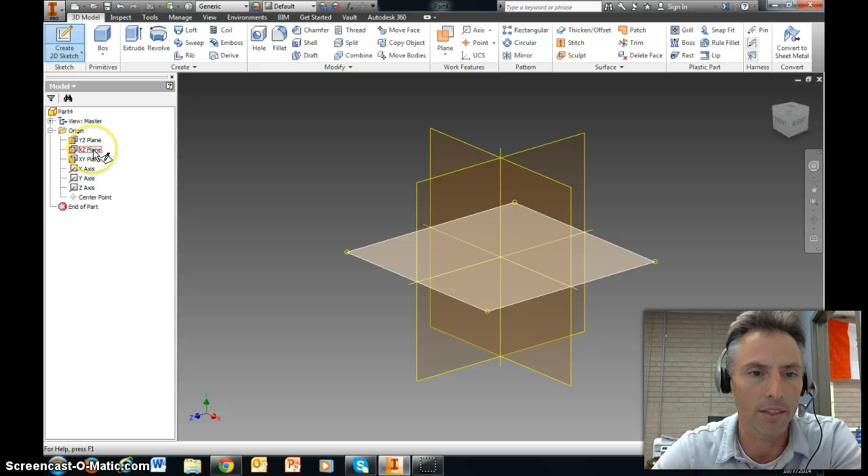Click on this sketch right up here, the 2D sketch, and you're going to get these options. Let's go ahead and hit the plus next to origin, and that's going to show you the YZ plane, the XZ plane, and the XY plane. We're going to go ahead and just choose the XY plane for what we're doing right now.

I'm going to start you off with a rectangle. So choose 2-point rectangle, and we're going to click once, drag down, and click again. Then we're going to go to dimension, and let's go ahead and make this thing 2 inches wide. We're going to have to zoom back in, and let's make it 2.5 inches tall.

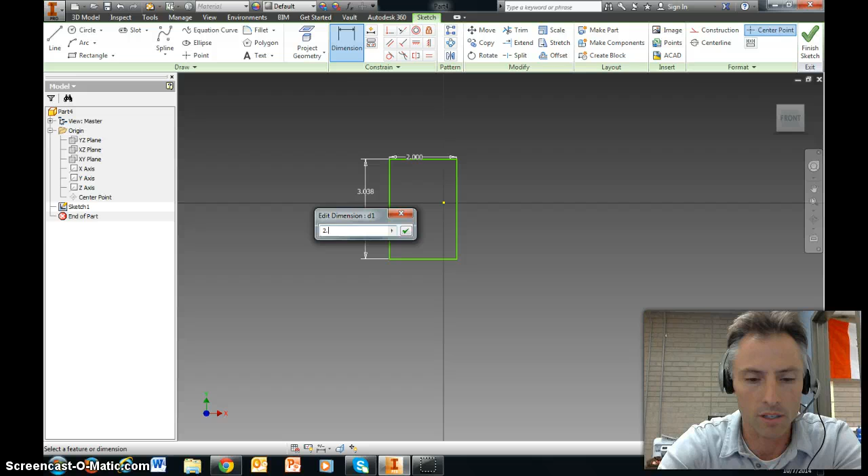Just like that. Now we're going to go to arc, and there's a couple different types of arc, but we're going to choose 3-point arc. The way that works is you click a vertice, then you click another vertice, and then you can pull your arc to make it whatever radius you want. If you locked it right here, that'd be a perfect half circle, which we don't want. We want a flatter circle than that.

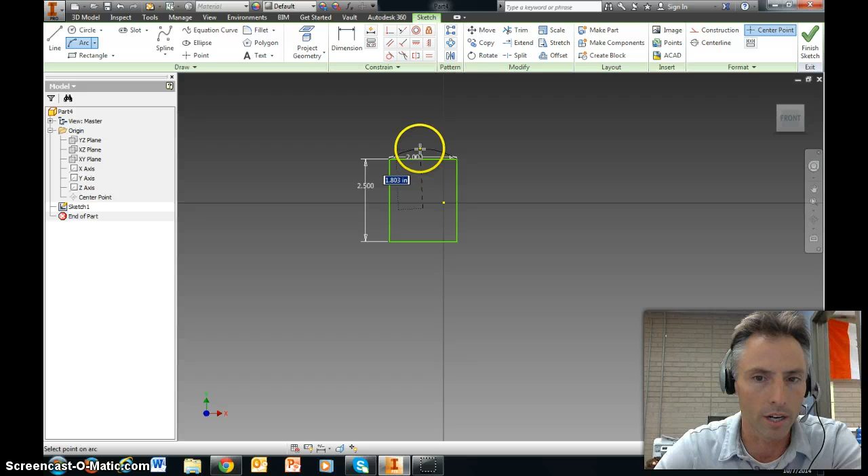So I'm going to put it right there and dimension, and let's go ahead and make this 2.24. So it's looking just like that.

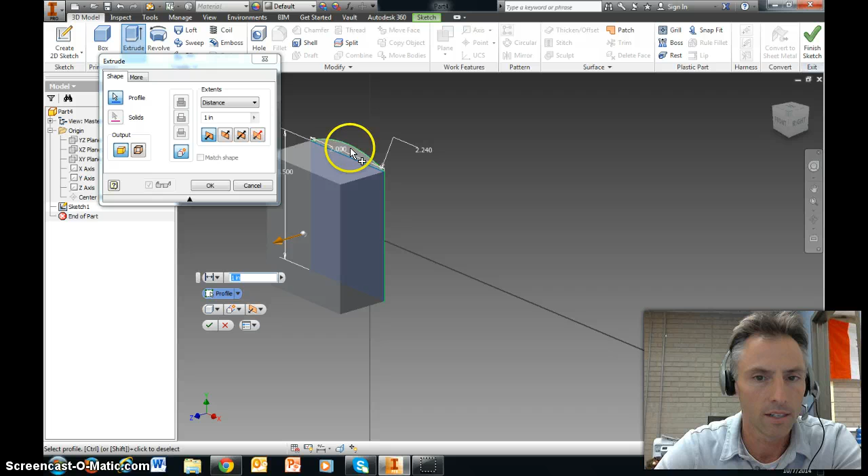Now we're going to go up to 3D model, and we're going to extrude this so that it has a third dimension. For profile, we're going to select this, and we can either extrude it forward or extrude it back, either one will work. I'm going to put a total distance of 5.5 inches. So it's going to look something like that.

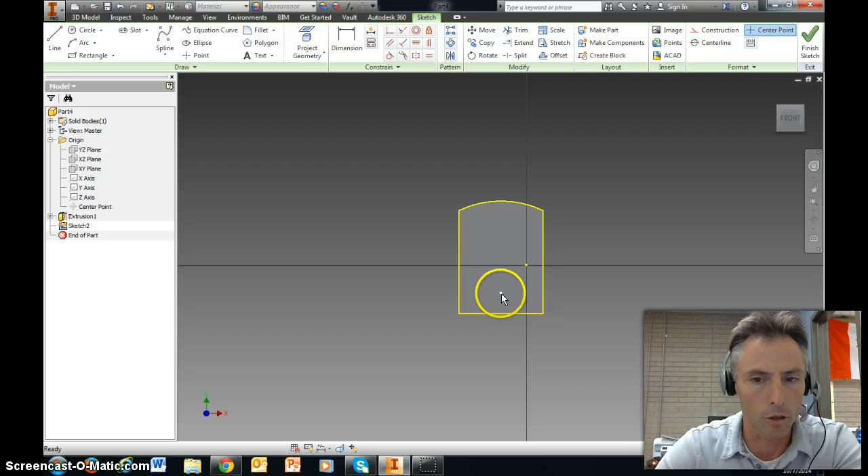Next step, we're going to take a sketch and put it right on the front of this guy. Now you want to be careful, you got a couple little points on here. You don't want to lock to those because it would constrain your sketch, and we don't want that.

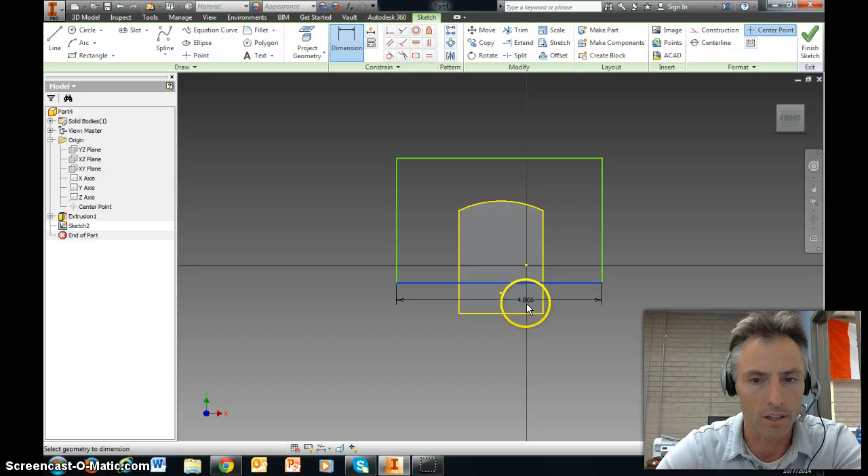So I'm going to go to rectangle here. I'm going to click up here and something like that. I want to make sure the top is well above my train and the sides are well to the outside, but this one is inside. Then I'm going to go to dimension, and the only dimension I need for this is to make sure that this line is 0.87 inches above the bottom of the train. And here's what that looks like.

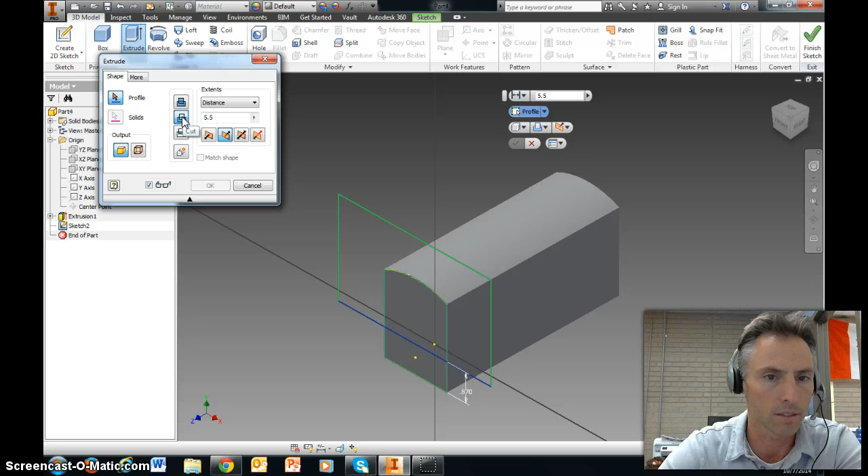Now I'm going to go to 3D model, and we're going to go to extrude, but this time instead of doing join, which adds material, we're going to do cut, which removes material. So I select this, the profile we're using is this rectangle. Now it defaulted to the same distance we just used, which I don't actually want. I only want it to go back 3.75 inches, and we'll say OK, and it should look like that.

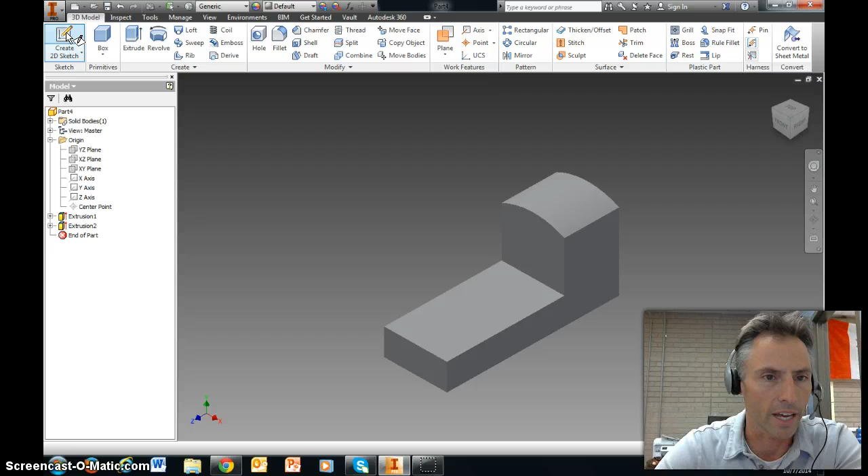Next step, a new sketch on the front face, and we're going to use circle. Again, don't lock it to anything in particular, just throw a circle on there. And let's now go dimension it and make sure that the circle has a diameter of 1.5 inches.

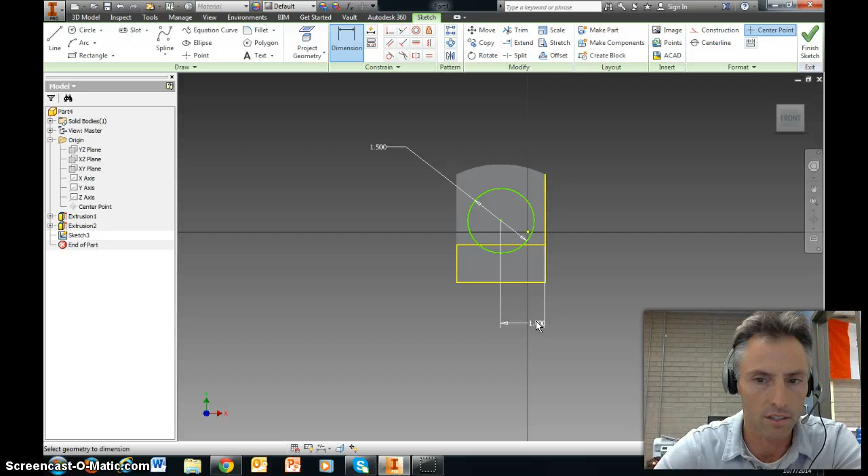And it has a distance from the side of 1 inch, because the total width was 2, so if the distance from the side is 1 inch, then it's centered. And then a distance above this line right here of 0.5 inch. And again, if we look at that in isometric view, it looks like that.

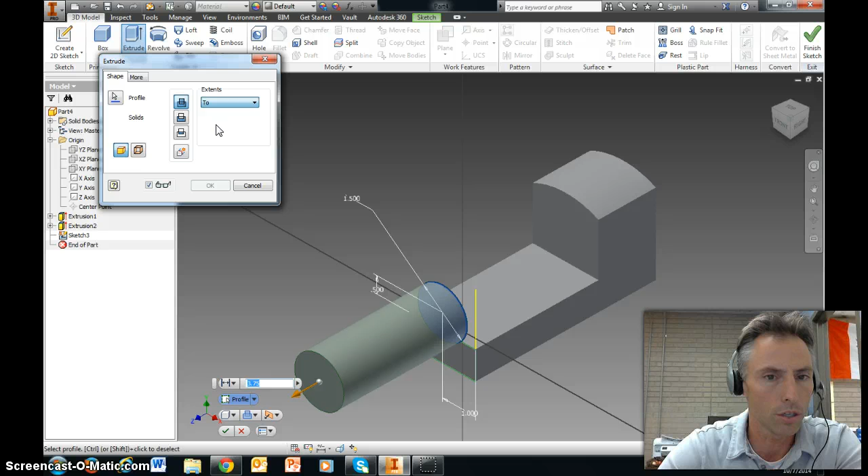Now what we're going to do is we're going to go to 3D model again and extrude, and we're going to select that circle. But instead of a distance, we're going to say we want it to go to this face.

Now it's in cut mode right now, so it would actually remove material if we left it like this, instead of adding material. We want to add material, so we're going to pick join to add the material and say OK. So now we have that.

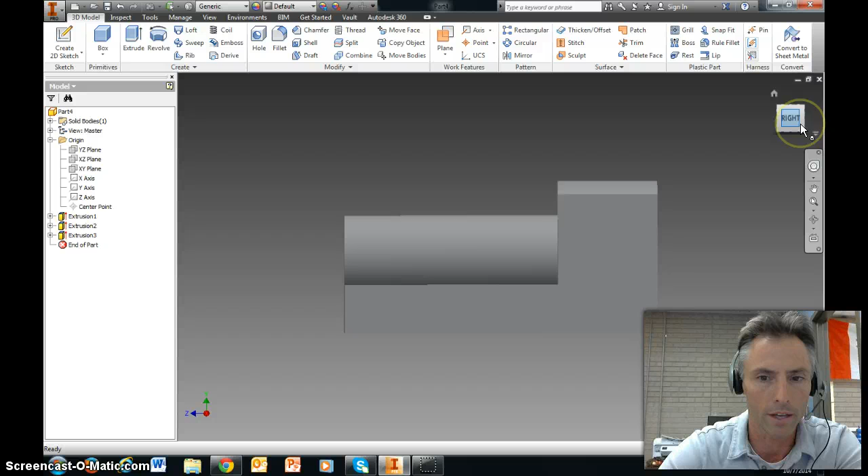Now I want to look at this face of the train, so I'm going to come up here to this cube and click right on the right face. So I'm looking right at it, and I'm going to put a sketch on it. We're going to put two things on here. First, we're going to take a rectangle and drop it just like that.

Then we're going to go to arc, and I want you to click on the bottom corner, and pull it out until you see the tangent signs right there. That tells you that arc is perfectly tangent into that rectangle and is a perfect half circle.

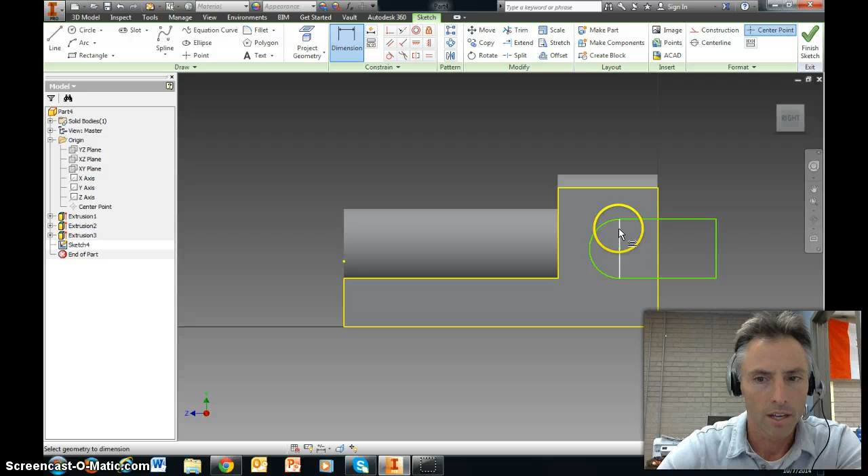Now we'll go to dimension, and I want to make sure that from here to here, the distance between those two edges is 1/4 inch. And I want to make sure that the radius of this arc is 0.5 inch. I also want to make sure that the distance from this center point to the bottom is 1.75 inches.

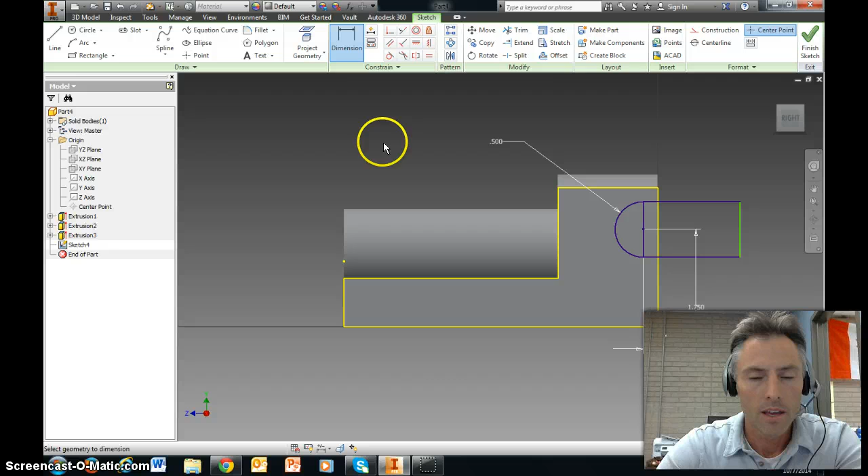Just like that. Now we're going to go back to 3D model and say extrude. Let's select both of these profiles, this and this. And we're going to cut it.

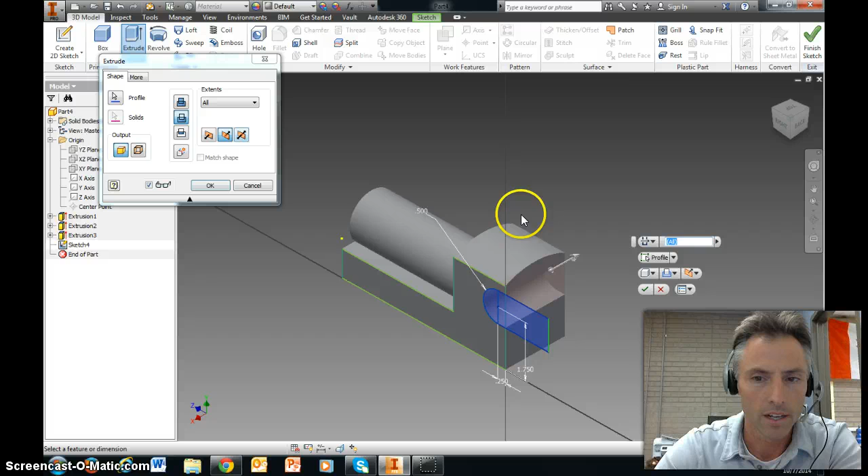Actually, let's go to an isometric view here. It's going to look like that. Let's just say cut all, and that's going to cut whatever material it runs into. We'll say OK, so now we have that. Let's look right at it again.

OK, that's looking good. Now we need some holes on the bottom of this thing, so the wheels can attach to it. So I'm going to say sketch on this face.

And I'm going to do point, and we'll put a point over here somewhere and a point over here somewhere. Now we need to put them in the right spots.

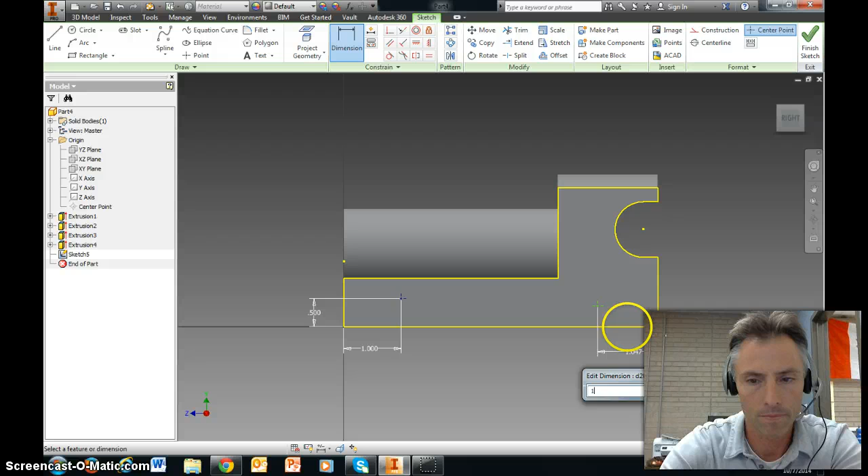So let's go to dimension. I want to make sure it's 1 inch off of the front, and a 1/2 inch off of the bottom. And the same thing over here: 1 inch off of the front, and a 1/2 inch off of the bottom.

Just like that. Now we can go to 3D model, and this time we're going to use what's called hole. It's the hole feature, and the hole will automatically select those two points I put in. If I go into an isometric view, you're going to see that it has selected those, and it's going to make those holes through. The diameter is set for 1/4 inch by default, and we're going to keep that.

And it's also set to go all the way through. There's no distance, it's just going through all, and that's fine also. We'll keep that. We're not adding any threads to the hole, so nothing else is going to change, so we'll hit OK.

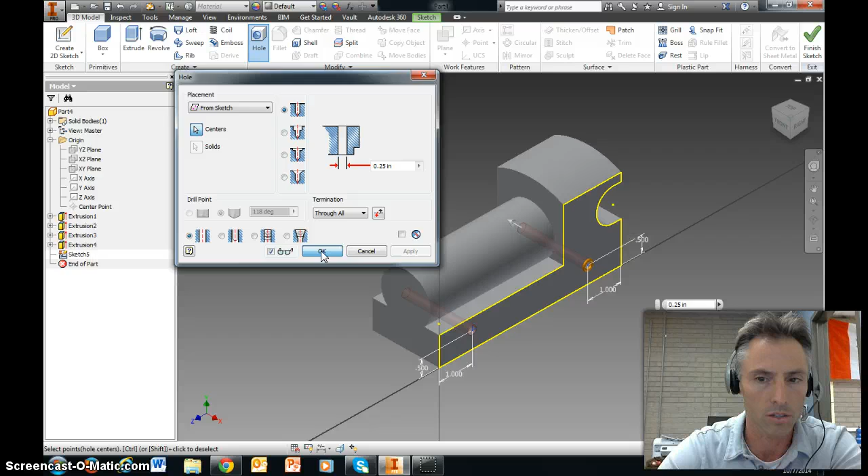All right, the next thing gets a little trickier. We're going to take a plane, and I want to put a plane right on top of this cylinder right here. So that would be just like that.

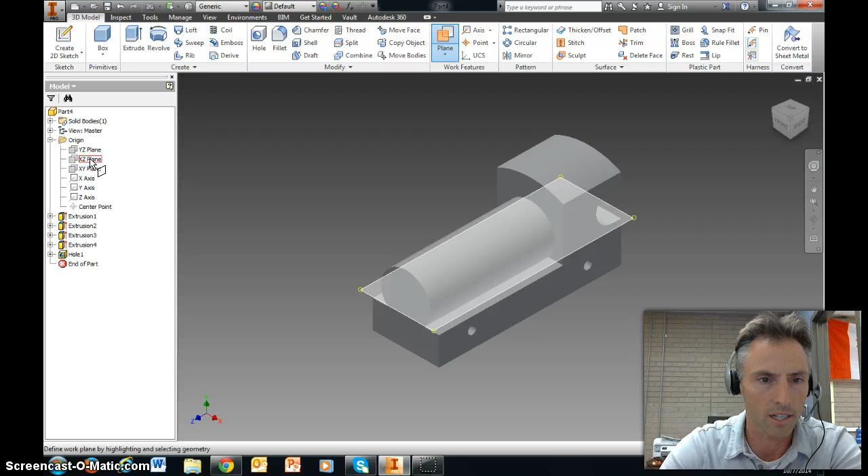It's going to be, so I've got a plane that's going to be parallel to the XZ plane, so I'm going to click on that. And I'm going to hover over the top of this cylinder, and right there it's creating a plane that's tangent to the top. So I'm going to click on it, and it just created that plane. You can see if I look at it from the front, it is tangent to the top of that cylinder.

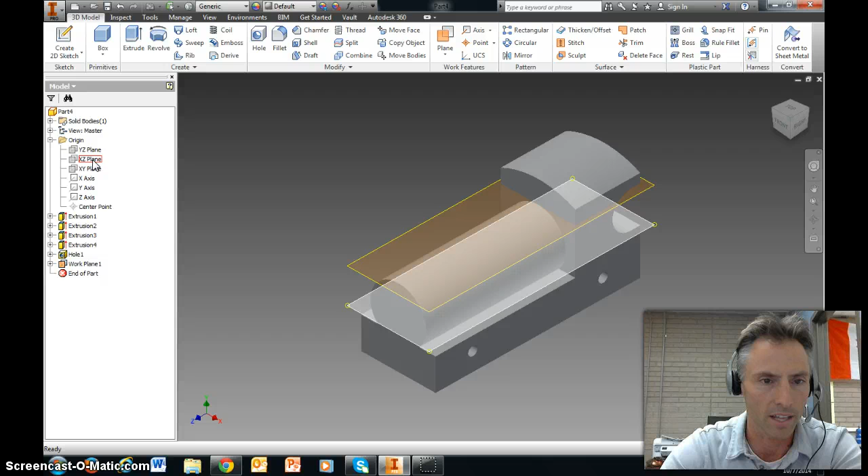And it made it for me by hitting plane and telling it I wanted it to be parallel to the XZ, and then panning over the top of the cylinder, it knew what to do. Next thing I'm going to do is go to plane again, and I'm going to click and hold on one of the corners of this plane, and it's going to allow me to offset an additional plane from that.

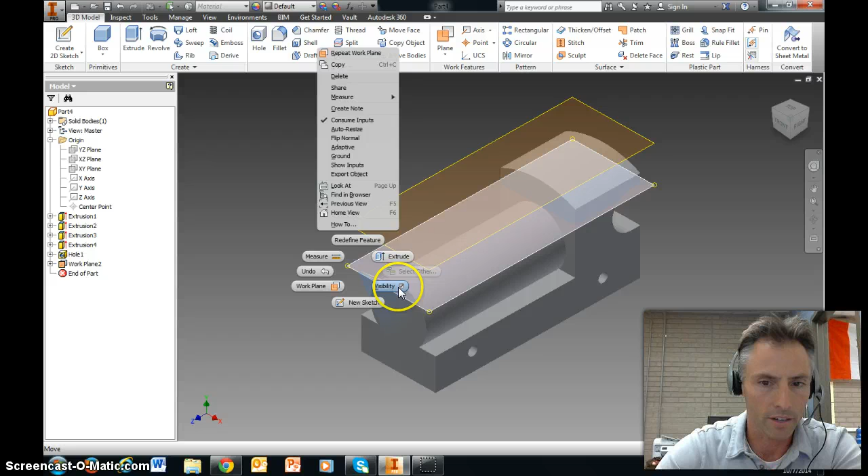I'm going to bring it up 1 inch, which you can type in, or you can just pull it up till you get to 1 inch, and I'll say OK. So at this point I now have 2 planes: one that's tangent to the cylinder, and one above it. The one tangent to the cylinder I don't need to see anymore, so I'll right click on it and uncheck visibility. But the higher one, if you look straight at it you'll see where it is, up above. We're going to do something with that.

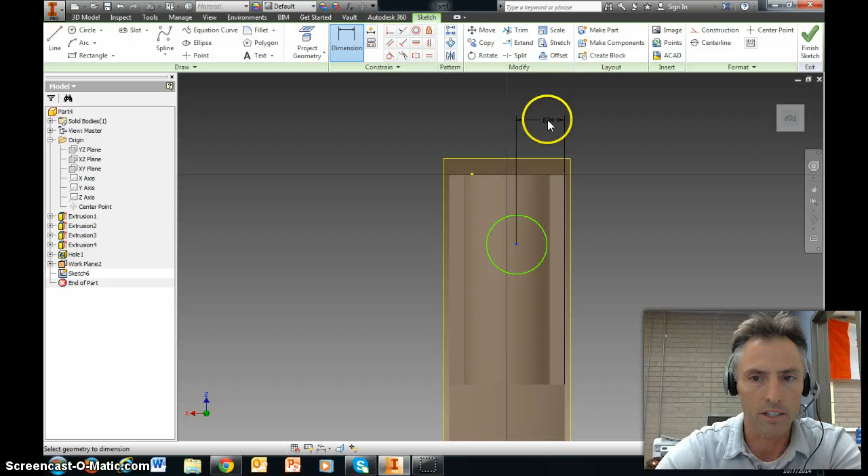I'm going to go to sketch, and if I click on the outside of it I can put a sketch plane right on it, and I'm going to put a circle right about here. I'll make sure it's exactly how I want it: 1 inch off the side so that it's centered, and from the front to the center point should be 0.87. And I want it to have a diameter of 1 inch, just like that.

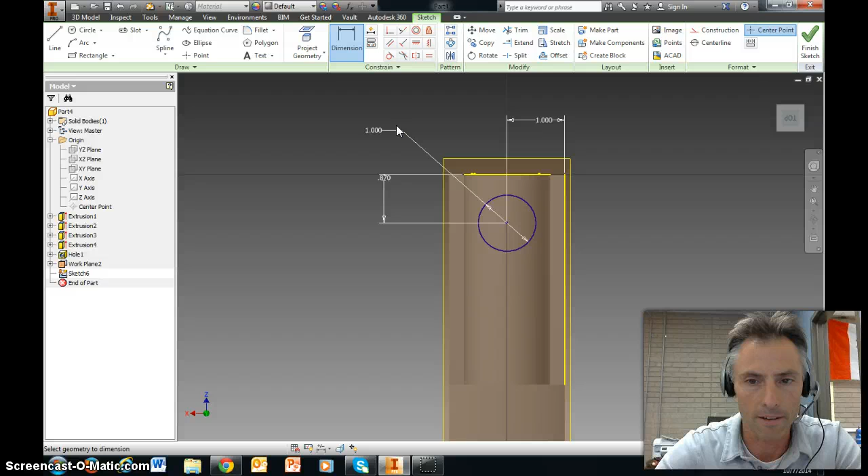Now I want to extrude it down. I'm going to look at it like this, rotate it back down, and actually let's look at it like that. I'm going to go to 3D model and say extrude that, but I want it to go down, and I only want it to go down 1.2 inches.

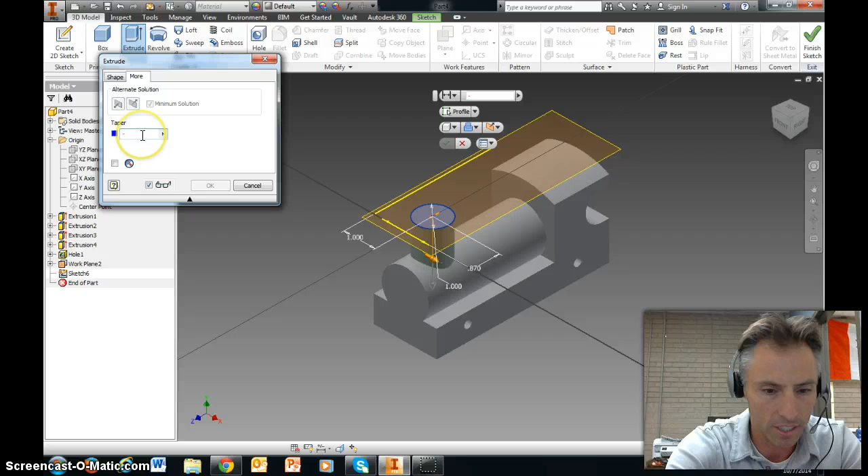When it goes down, I want it to taper so it's getting smaller as it goes down. So I'm going to click on this more button right here and put in -15 degrees. What that tells it is as it's going down, it's getting a little bit skinnier. Then we'll hit OK, so now it's made that. Now I don't need to see this plane anymore either, so I'll right click on the edge of it and uncheck the visibility.

Now we want to make this look even fancier on top also, so I'm just going to put a sketch right on the top surface of it, and that activated my little circle. So that's all I had to do.

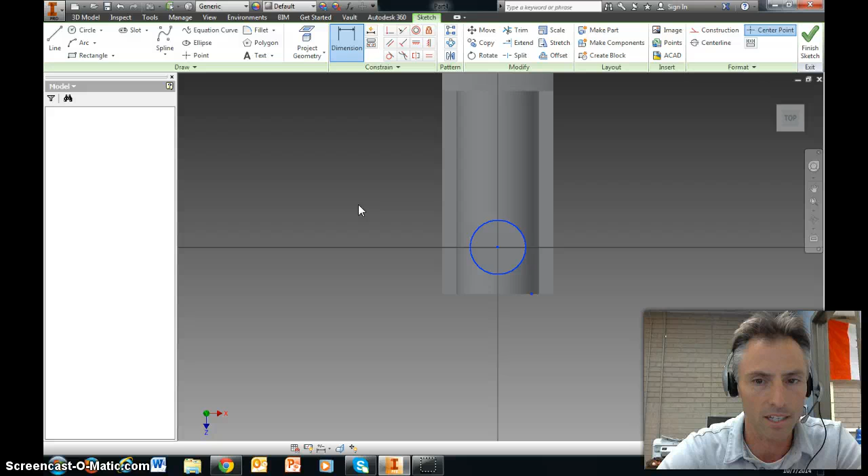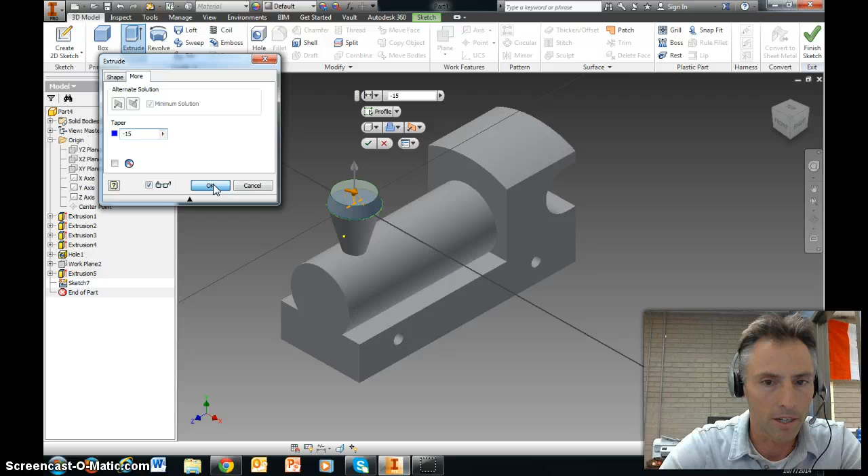Now I just go straight back into model, and I'm going to say extrude, and I'm going to bring that up, but only 1/4 inch. When it's coming up, I want to taper it also, so I'll go to more and give it a taper of -15 degrees also. I'll hit OK. So now I've got a nice little smokestack on my train engine, and it looks good.

Okay, now we're going to round this thing off. We're going to round off every edge on here except for these holes, because we're going to need these holes to attach wheels to later, and they're easier to use if they're not rounded off.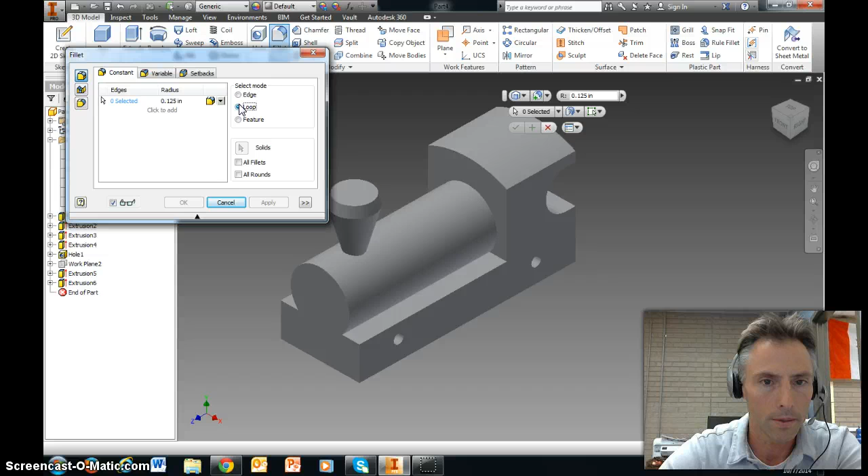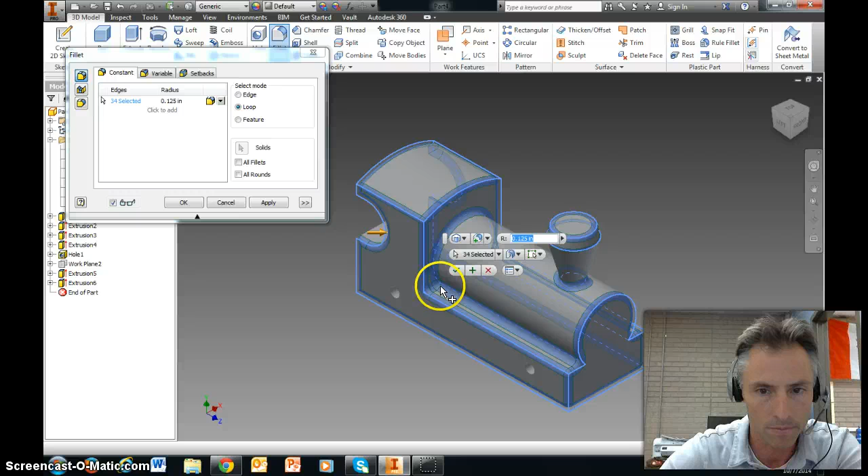So let's go to fillet, and I'm going to say loop, and I'm just going to go around this train and select every loop that it'll let me select without choosing those wheel holes. It doesn't take all that long to get them all. Let's rotate to this side - there's one. And if you miss one, it's not a big deal. This is purely for aesthetics; it doesn't change how the function of the train is going to be.

It defaulted to a radius of 1/8 inch on this fillet, which means it's rounding it with an arc of 1/8 of an inch. That sounds good, so we'll just hit OK.

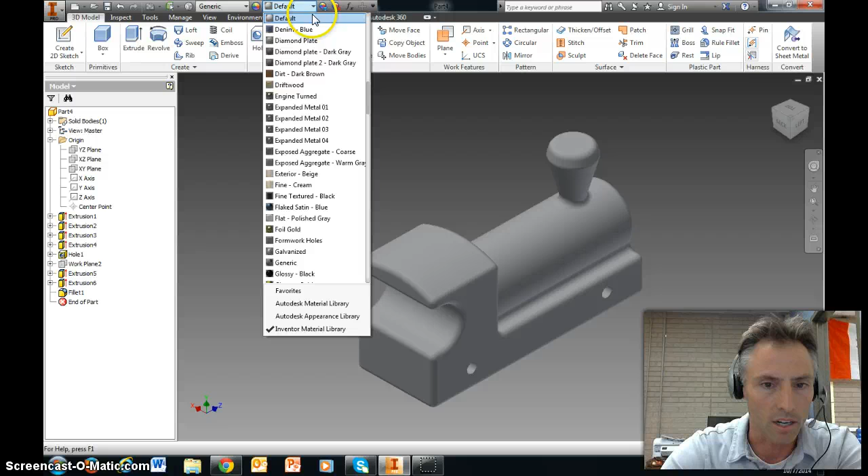The final step now is just choosing what color we want it to be. So I'm going to come up here to where it says default, and click, and you get all kinds of different colors. So maybe we'll say, hey, this is a gold metal train. And there it is, chugga chugga.